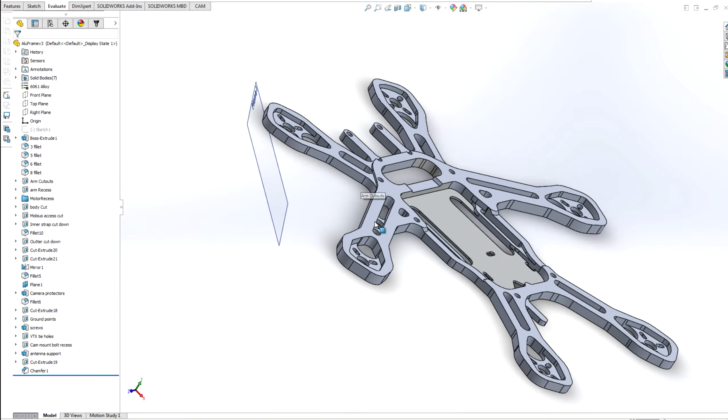So for instance, these long arms on the side are the most prone to bending. The very short stubby ones on the front are not nearly as bad, so they're cut down to the same thickness that they used to be. These are still 3mm on front, and just the side arms are the full 4mm.

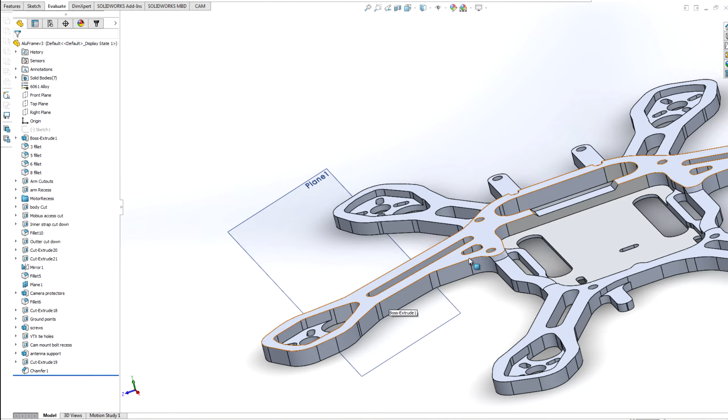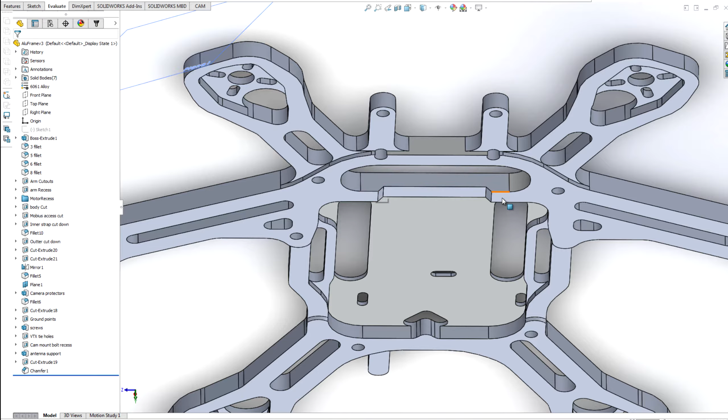So we've got this bar running across the middle to give it strength. The one through the center wasn't quite as critical - we need the stiffness there because of all the bending forces from those arms, but we don't really need the full 4mm. So that's just chopped part way through, just to save weight on that center crossbar.

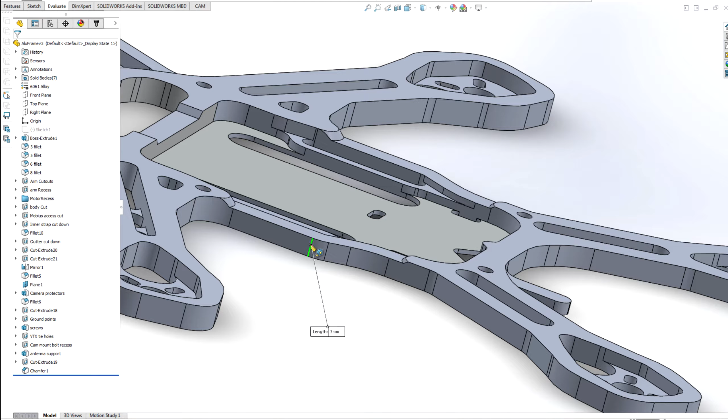The middle section of the frame seemed to also not be a problem, so it's cut down just a little more - I think this is 3mm, same thickness as the previous version of the frame. Then the rear legs, which are just a little longer than the ones in front, have a little extra material - not the full 4mm from the long side arms, but just enough to give it more stiffness in the back.

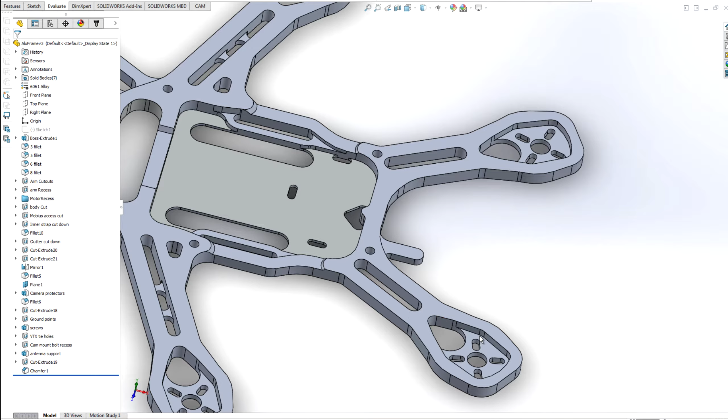All the regular features that we added in the previous one are still there. The tail and the cam mount are unchanged, although they're cut down to the same thickness as previously.

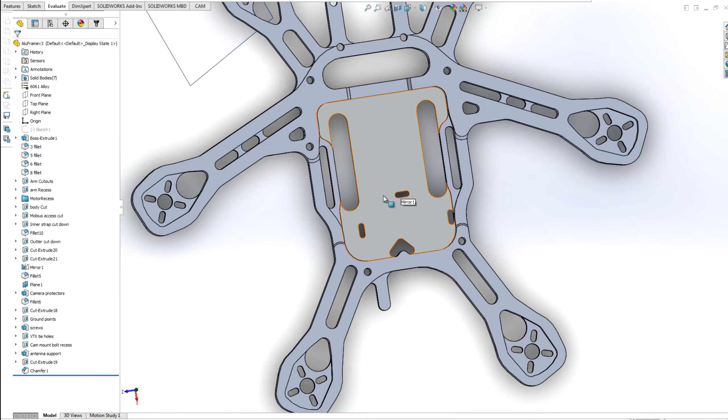Also, the heatsink pads are gone - that was just a complete failure. So we saved that weight, cut it completely flat, and leave that center section just nice and simple, and we'll figure another way to deal with that.

And then also here on the inner sides, where the Velcro straps go, these are cut down even thinner than the 3mm sides, because honestly there isn't a lot of force there, so they don't need to be quite as thick. That's just to hold the battery on, and it's not a super big deal, so we save additional weight.

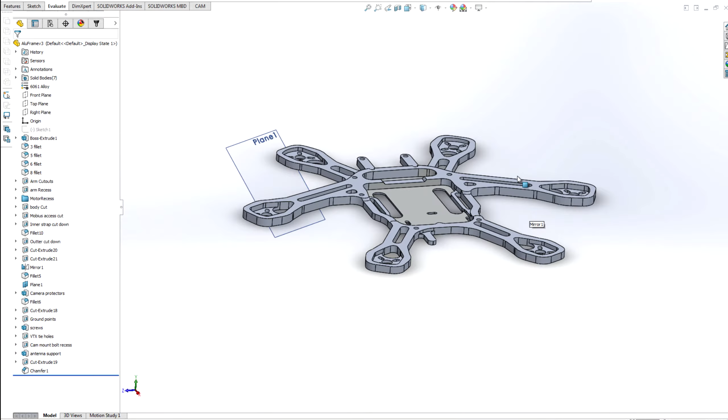Unfortunately, we've added a lot of material - we've added a lot of weight to this build. We're up to 49.3 grams, so we're up 4.9 grams from the previous version, but we really want to get that bending under control, and if this is what it's going to take, well, we'll just have to see. We have tons of power with the hex, so another 4 or 5 grams, we've resigned ourselves.

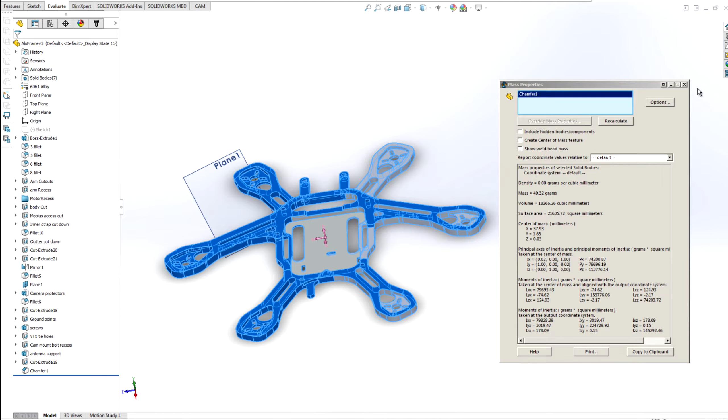This is going to be a heavier build because of the material, but it's not as bad as it could have been. We've put a lot of work into trying to keep the weight down, like all of these cutouts, where we really keep that extra material just where we need it, and aren't wasting it. It could be quite a lot heavier if we just went with a normal 2D cut out of a thicker material.

And the currently flying build of this frame, I did finally get that antenna mount nice and the thickness that it needs to be, so I've got that worked out. This works fantastic - this is super sturdy, puts no strain on the VTX at all.

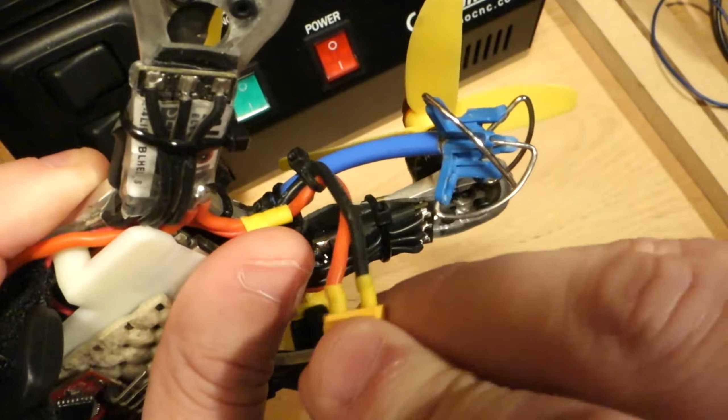I usually have a third zip tie, but that's managed to pop off there, and in this case I'm just putting strain relief, because I don't have strain relief on the connection to my power lead, so I just have it tied off there to the antenna to strain relief the XT30 battery connector, and that works.

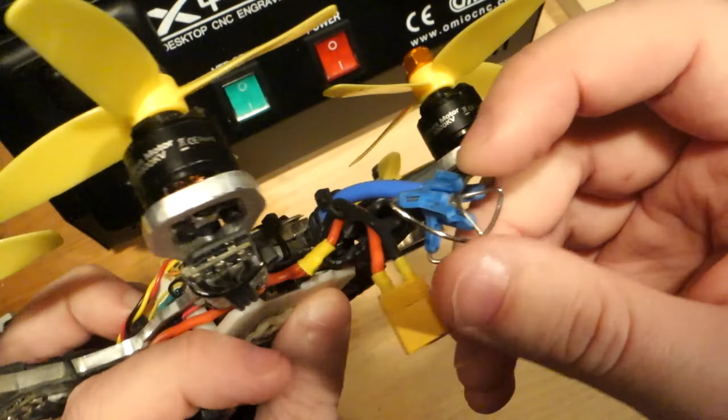This has just been really fantastic, and I love this setup. I am smashing these antennas a lot more now, so I'm looking at better solutions to deal with that, but they're not too bad - even this flies okay even with one of the lobes missing. It's not ideal, but it's not something that's going to end a session.

And it's fairly easy with the zip tie straps - it's really simple to just cut them, pop it out, and solder a new antenna on when I'm repairing. This one has been smashed. I don't have a cover for this because of the slightly different size.

This one's been smashed up pretty good. The case on the FC doesn't hold itself together anymore, so that's why I've got the bigger zip tie. This is just one with a field repair. I happen to have this in my bag to keep the receiver on.

I also have a bunch of extra wiring in this one since this is the one I'm actively flying. This is the one I have my voltage telemetry sensor hooked up to, so I have the telemetry wiring in place here, where in most of my other builds it's already been taken off. The camera pad built directly into the harness this time saves a little space and keeps the extra rat tail from the camera working.

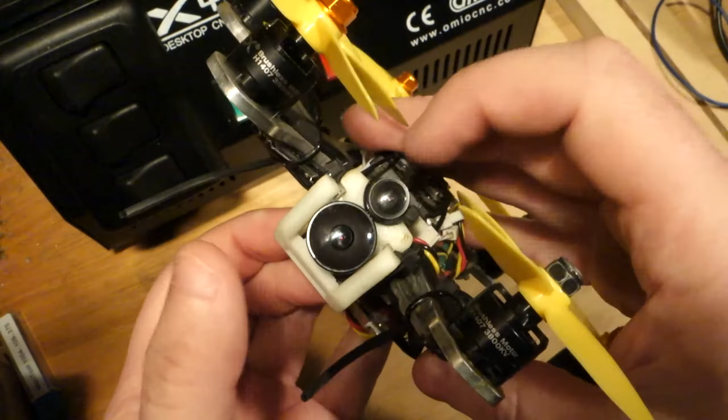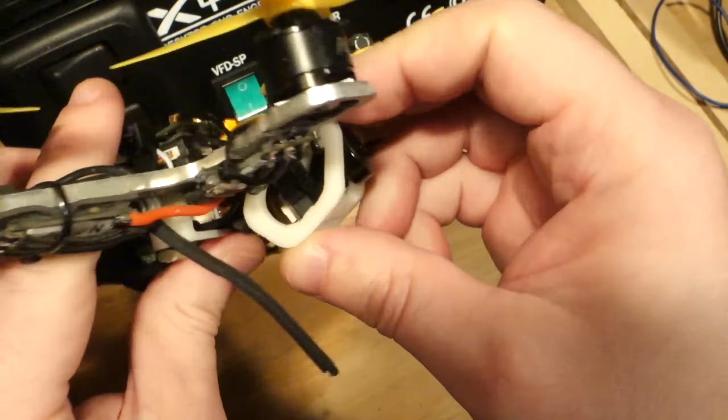This has the full Mobius protector mount on it, so that's why this has got the huge roundabout. This is mainly here to protect from nose strikes and does a good job of keeping the ribbon cable from getting messed up with concrete. Obviously it doesn't protect the entirety of the lens, but it keeps things from getting too aggressive.

The lens isn't completely out there hanging in the breeze. If it gets smashed and pushed back on, this whole thing can slide back and help absorb some of that shock, and then these plastic bumpers are there to take the rest of the impact if needed. This has worked okay.

I really miss the size of the 808. The Mobius is a bigger pain to get that camera in there, but for the extra resolution, it's kind of a toss-up. I kind of default with the Mobius because it's just a little easier to work with, easier to get spare parts for the ribbon cables and stuff like that, but it's just what it is.

Still doing the frame grounding on this. You can see there's one of my ground points here for the rear ESC, and then the ones for the front, and I've had no problems with that.

This build is with 1407s, the 3800 kV, lots of great power, and the first build that I did with BL Heli S, this has got the Aikon 30 amps. Although these motors test for higher efficiency than the 1306s, I actually had a lot of problems with sag on this build versus the 1806.

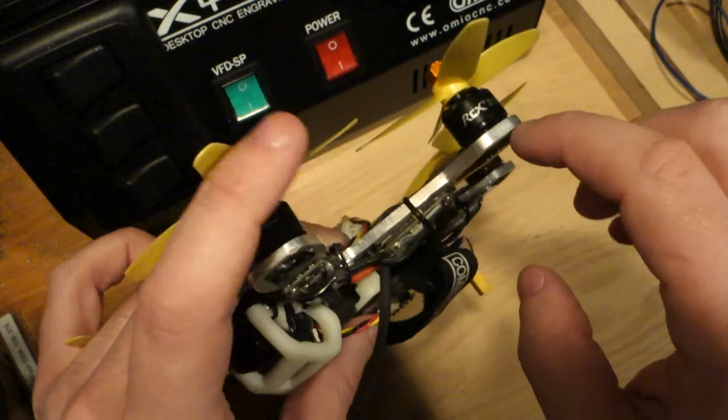Or versus the 1306, where running the exact same batteries, I mean these should have lower draw at the same - they've got the slightly lower kV and more torque, so they're at about the same power level or thrust level. But it wasn't the motors that were doing it, because this was the first BL Heli S.

These ESCs are a lot more aggressive on fast transitions, and so I was actually tripping my low voltage warning just because of the transition power of this. And that's where you very commonly hear: set your start power to 0.125. That made a huge difference with this, dropping the start power, keeping it from absolutely murdering the batteries every time it's got a quick change in throttle position.

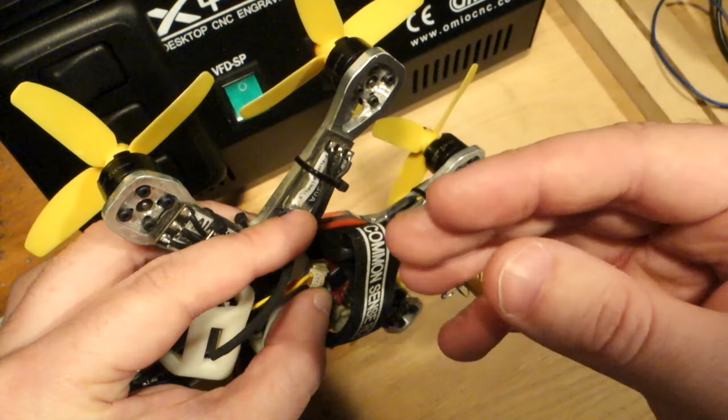Which isn't just on the stick, but also like when you bump something and it tries to correct, you get a huge spin up on the opposite side. So it's using the full power of these things even when you're flying very gently. That made a huge difference, brings it back down, and I don't have as much sag problems on this build now that I've got that turned down.

So it's just one of those little things - you'd think to blame the motor, but in this case, it happened to be the ESC, and that's made this a lot more generally flyable.

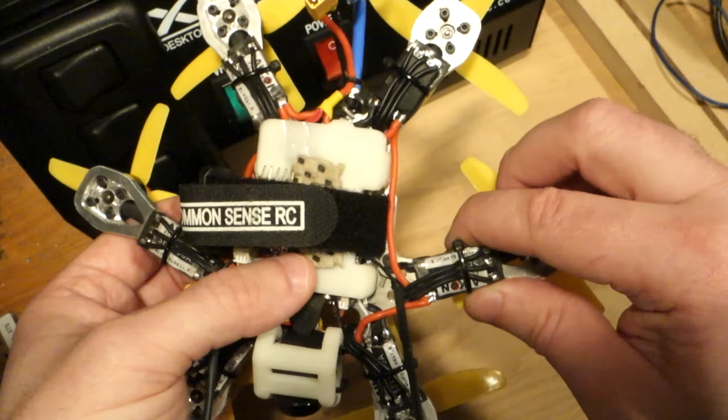Have had a lot of problems with these. You can see I've got a lot of these have had to be replaced a couple times. I had some just mysteriously die - like they were flying fine, landed, and then a week later went to power up, and they were completely dead. I don't know why. So I've replaced them a couple times.

Not the happiest. I mean, I haven't had any blowout while flying, but I'm not the most impressed, to be honest, so I probably won't be using the Aikons again. But in this case, just as a test, they work great, and they spin super smooth and super low, and I love that.

My battery lead in the back, like I normally do with this setup. You can see I'm not using the PDB. All of my wiring comes off the harness, and then of course the black goes to a central ground point right there.

I have a lot of tiny rework in here. The battery for the Mobius is using the smaller of the batteries that I use, and you can see it tucked in right there. This is a 75 milliamp 1S battery.

I've got that into the normal battery position, battery plug there, and this is just taped to the base of the frame, and that keeps it alive for about 2 or 3 minutes. Again, just enough. Much better than the Super Cap, much lighter, and it's kind of a pricey battery to get from Mouser, but if you can find another supplier, this is really an ideal thing for the keep alive.

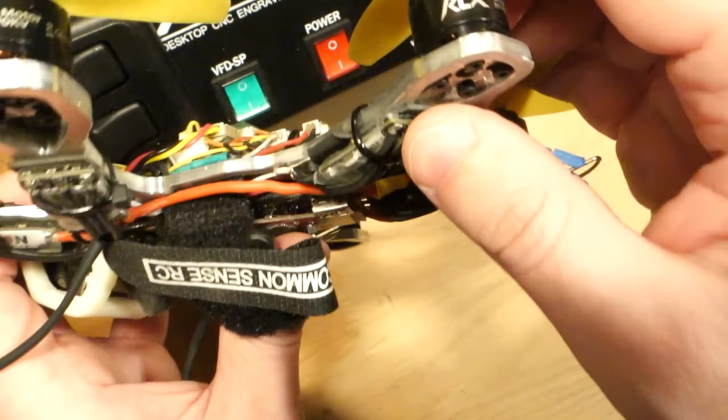The cutouts have not been a problem. I still don't have any bending on the frame, so we're all perfectly fine on that, but I've totally been able to bend these 4mm arms, so gonna have to keep working out the next version.

This is still, of course, 6061. So the next step is going to be to cut the same thing out of 7075. It's much higher breaking strength, which should hopefully prevent the bending. That's what I am hoping to get out of it, at least. So we'll give that a shot.

It's not as bad as it was in the earliest ones. It's definitely still improving. I'm not wrapping arms up at crazy high angles, but it's definitely getting just enough of a tweak when you get in a good hard crash. Not stuff going forward so much, but like if you're up in the air and you drop out, and you fall on a motor like this, or you're spinning hard and get an edge impact, that's where it really causes problems. So it's not an every crash sort of thing. We're getting better, but it still just isn't quite cutting it. So keep working on it.

Still fun to fly though. Getting on the heavier side, this one is up to like 300 grams or so. The Mobius doesn't help, the extra plastic for the things isn't great, but hopefully with the 7075 we can cut down a little bit more of the frame weight. We'll have more strength than we need with the material change, and so we'll be able to lighten the frame just a little bit more and simplify some of the stuff.